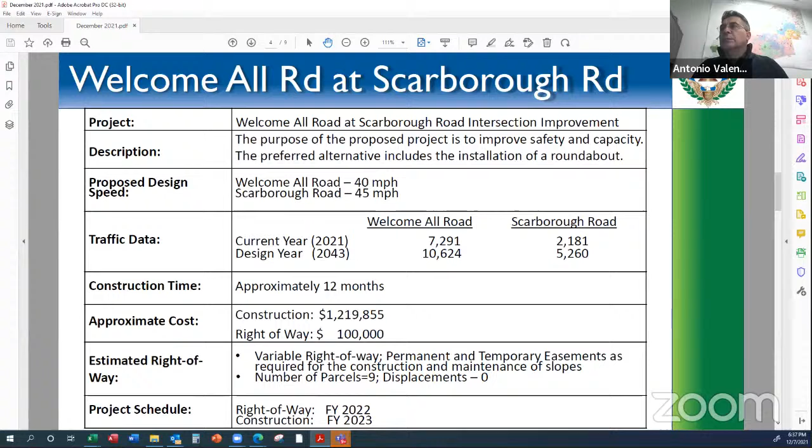The first project I'd like to discuss is the Welcome All Road at Scarborough Road intersection improvement project. I have a fact sheet in front of me here, just to give you some information on the project. The proposed project is to improve safety and add capacity. During our conceptual studies, we studied 3 alternates for this project. The first alternate was the no build, leaving the 4-way stop as is. The second alternative we looked at was to remove the 4-way stop and review a conventional intersection with a traffic signal. Unfortunately, a traffic signal was not warranted for the 20-year plus 2-year design, which would be 2043. So adding a signal, we can't. That didn't meet the need and purpose.

So we reviewed a third option, which is popular by demand, the roundabout. The preferred alternate at this point is the roundabout. That removes the 4-way stop. It keeps traffic flowing. It improves safety by reducing the conventional conflict points from 32 down to 8, so that it's safer. It improves capacity. It also provides improved aesthetics for the area, and it improves lighting as well. Lighting always makes it safer.

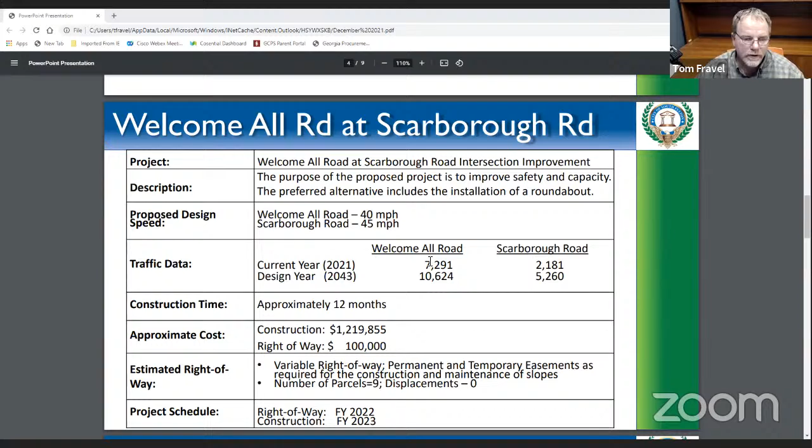We do have 9, we call them parcels, so we'll be purchasing some land and easement from 9 property owners. Then construction will be in 2023. So with that said, I'd like to go ahead and jump into our layout.

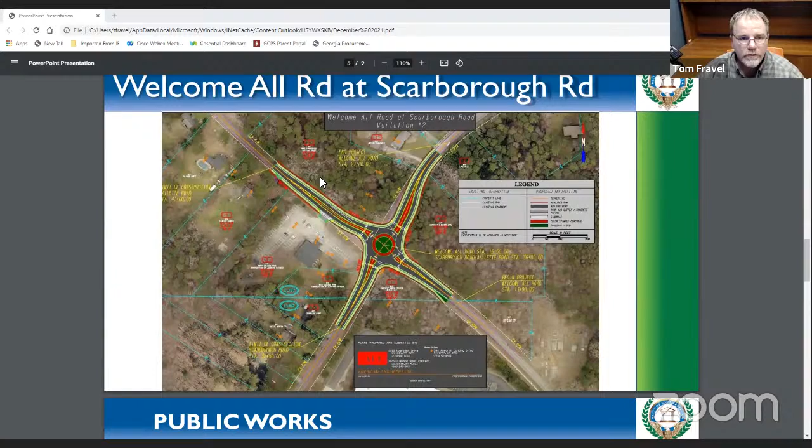And just to get everybody acclimated, this is an aerial photo, okay? So you can see my pointer. This is Scarborough Road right here. This is Welcome All here, and this is Welcome All here as well. The purple lines that you see, that's the existing edge of pavement. This is the Jehovah's Witnesses church, and we have a large industrial site here.

So you can see this is our proposed roundabout. The roundabout's going to have lighting. It's going to have sidewalks all the way on each quadrant. Between the sidewalk and the edge of pavement, we'll have curb and gutter. We'll also have a concrete red stamped brick, and that'll be for low maintenance. So this entire intersection here is handicap accessible.

So you can see this is where your crosswalks are. We have some handicap ramps here, and this line right here is your traffic islands. Splitter, so we have 4 splitter islands. The way we laid out the roundabout is we did a left-centered approach, and when you do a left-centered approach, it's easier to get into the roundabout. These roundabouts are designed for about 22 to 25 miles per hour. This will keep traffic moving.

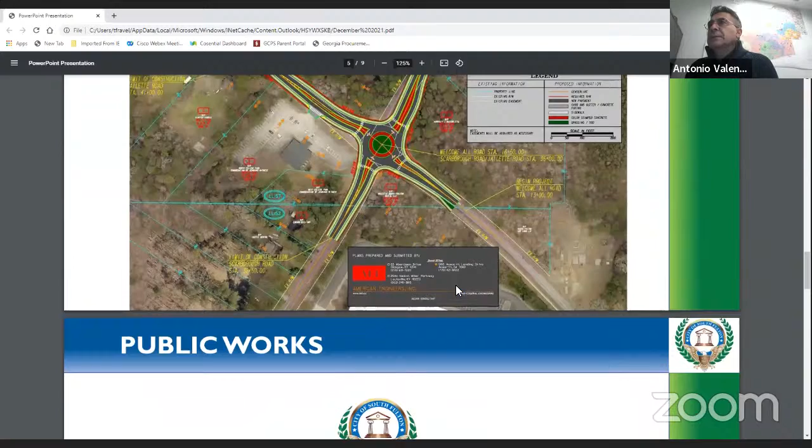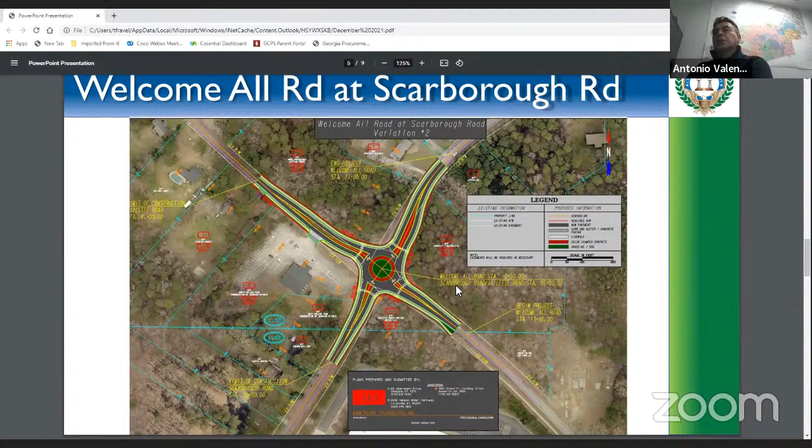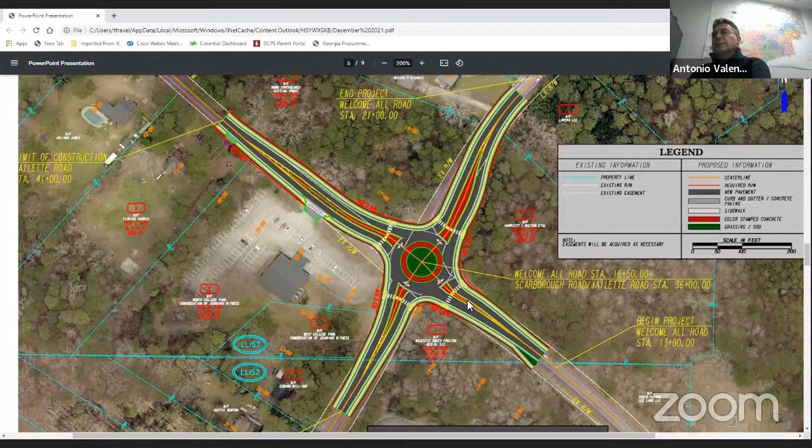But while our residents are looking into the project, Tom, can you talk a bit more on what happens to all types of vehicles that go through the roundabout? We have solid waste trucks that are very common now in our city, school buses, fire trucks just next to Welcome All, getting closer to Roosevelt Highway. Can you share with our residents how those vehicles go through the roundabouts and what you designed to accommodate those types of vehicles?

Yeah, thanks, Antonio. That's no problem. So I zoomed into this roundabout, and these roundabouts are popular at the moment. I've been out here before, and it does have some truck volumes. There's a sign posted here that says no trucks allowed, but just say we have a vehicle. You'll be going south here, and if a semi truck has to turn, he'll be coming in here. He'll have to yield. First thing, when you come up here, you have 8 points of conflict.

The first point of conflict is your pedestrian crossing here, so you will have to yield for pedestrians. If there's no pedestrians there, then you come up here to your yield. You will have to yield for oncoming traffic here. So if you don't have any traffic, you come on out. Then the trucks, this is actually designed for a large WB67.

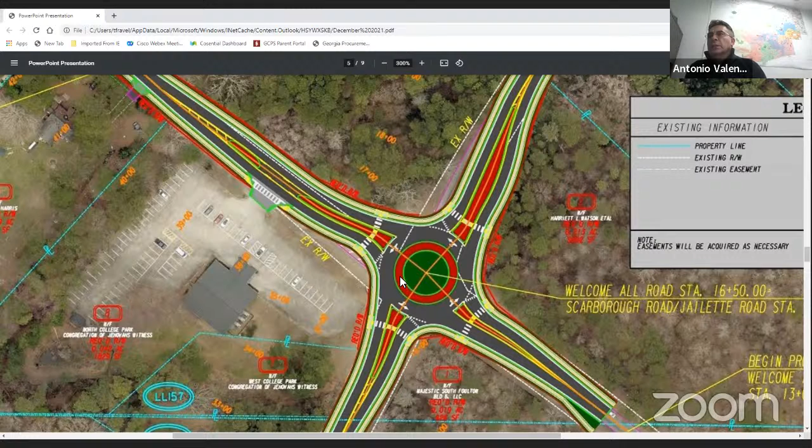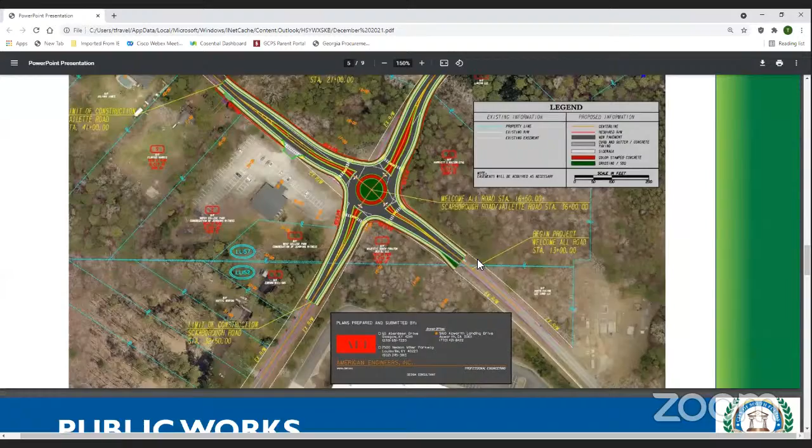So in other words, Tom, what we're conveying to our residents is that fire trucks, bus trucks, solid waste trucks that are allowed on our roads will easily and safely maneuver through the proposed roundabout. Yeah. All right. So we've got some questions coming in, and I know that we've addressed them, but some of the people were typing while you were talking and so forth. And so we'll just make sure we address it.

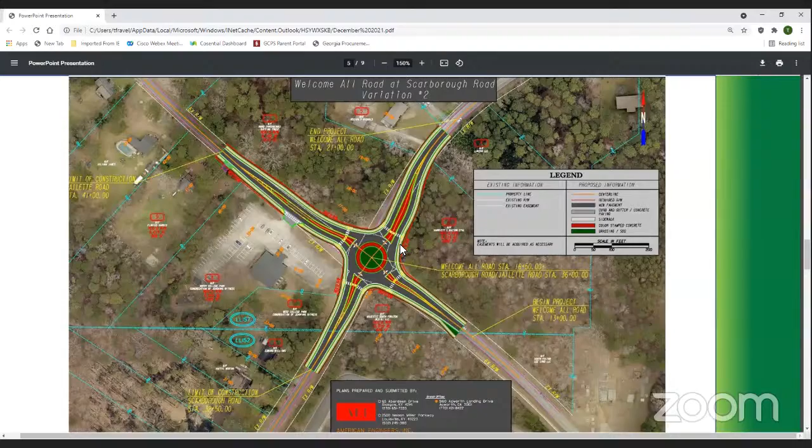Ms. Glenda Collins asked, will the roundabout accommodate for additional growth in the area, and will it accommodate large trucks? And you just explained how the trucks will maneuver through. And if you would please go back to your first slide where you showed the 20-year projection in traffic. So the answer is yes, we will accommodate for additional growth.

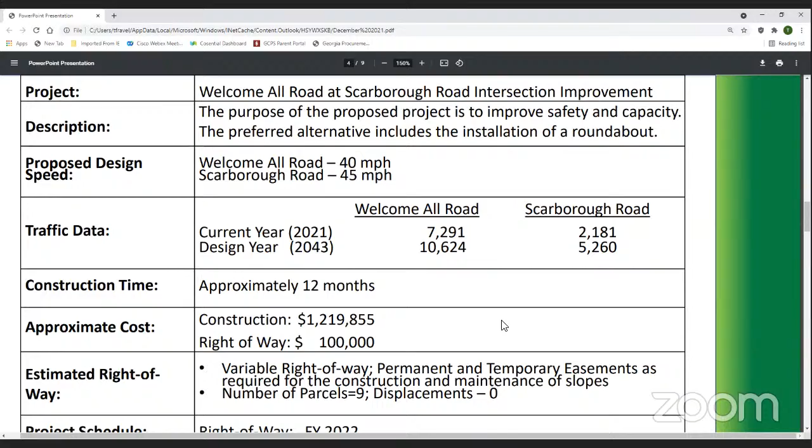Jay Horn asked, have you notified the 9 homeowners for the easements? So we have not, we're still in what we call conceptual, meaning that we haven't developed any plans yet. So the next step is for us to respond to all these comments in writing. If we don't get any negative comments, it will go a lot smoother. So then if we don't get any negative comments, if the preferred is the roundabout, in January, we'll be cut loose to do our plans.

And it'll take us about 60 days to do preliminary plans. Then we'll go through a field plan review. The city will review our plans and we'll go back and forth in some meetings. Then at that point, we'll do some right-of-way plans, and it'll take us about 2 weeks to do those. Then Ben, that was just on the meeting just now, his firm actually buys the right-of-way.

So at that point, I would say in the middle of 2022, we'll be knocking on the doors of those 9 property owners. And with 9 property owners, it probably will take us about 6 months to come to terms with all the property owners. Then we can go out to construction after that.

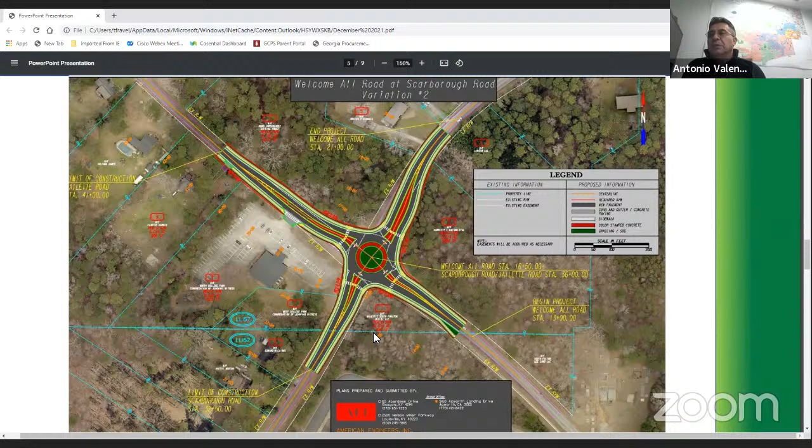Tom, if you don't mind, just explain to them what those red boxes are, where you have labeled those 9 parcels that we're looking into. Not necessarily the entire parcel. You just identify those 9 parcels that will be impacted somehow. Some will be minor and some may be a bit more. You can see here's the existing right of way here, this white line style here. Okay, so that's the existing right of way.

The red right here is required right of way, because if we have sidewalks, we can't just put that on your property, it has to be on the city property. Can you zoom in a little bit, please, Tom? Say it again. Can you zoom in a little bit? Yeah, it's going to get blurry on us, unfortunately. Right. So that may not do us any good. So this is parcel 1. Okay, so then they got a little bit here, a little bit here.

So here's another parcel here. So this is existing right of way, but we feel like we're going to have to buy some easements to be able to construct this. But you can see that the sidewalk is going to be within the existing right of way. So we can just purchase what we call temporary easements from this property owner here, and probably this one here as well. So on and so forth. Here's parcel 9. So we're not taking much property. It's pretty minimal on this particular project.

Let's see here. Another question. Let's see here. Says, will this roundabout mirror the roundabout at Sandtown? And let me address that. The roundabout on Sandtown, I assume they're making reference to the Campbellton Road at Boat Rock and New Hope roundabout, which is a similar approach, but not necessarily a mirror of the roundabout.

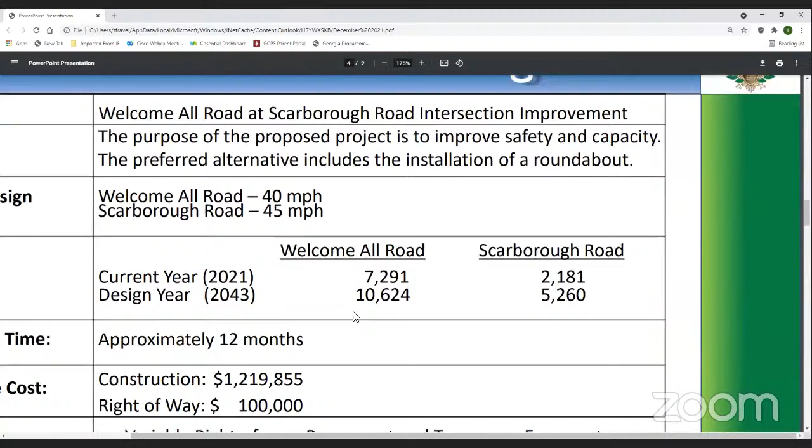There's a question, it says, I apologize if I missed it, but when will the notice to proceed be given on construction? And what is the expected completion date? That comes from Mr. Alvin Jackson. Yeah, it's good to have the dialogue. It's good to promise and be aggressive. And the nature of public works for the city of South Fulton is to ensure that what we commit is what we're going to build, and ensure that our consultants and contractors stay within the timelines committed.

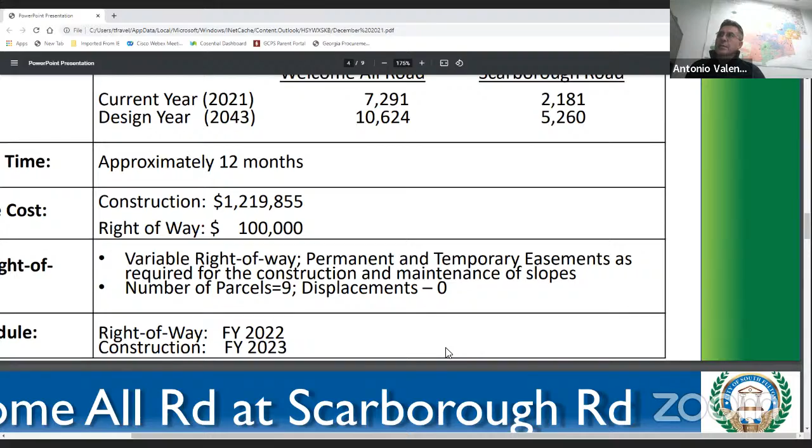However, there are certain circumstances that are not under our control, such as once we go into the stage of acquiring the rights of way, apparently 9 parcels, it should be an easy task for us. And I hope that our residents work with us. And if we successfully acquire the needed areas for this project, we'll definitely be on schedule. Our goal is 2023. And our goal to construct this project is 12 months. We probably can do it in 10 months or so, but it's all upon other constraints that are not under our control.

We have a question here from Ms. Glenda Collins. Says, will the city of South Fulton be responsible for maintenance, and were meetings held with the residents of the area? Yes, the city of South Fulton will be responsible for maintaining. Those two roads are local roads, and we will be responsible for maintaining the rights of way for the improvement of that area. Okay. Here's one, says, how much additional lighting will the design bring?

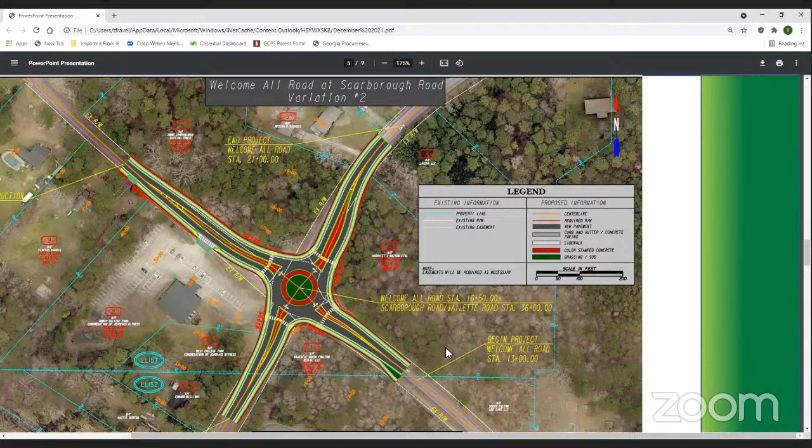Additional lighting. Oh, lighting. Street lighting. Our consultant team will work with the proper power company. They are the ones in charge of designing street lights, and our company will provide the layout to them, and the design will be provided to us. But the intention is to light the four legs of the roundabout.

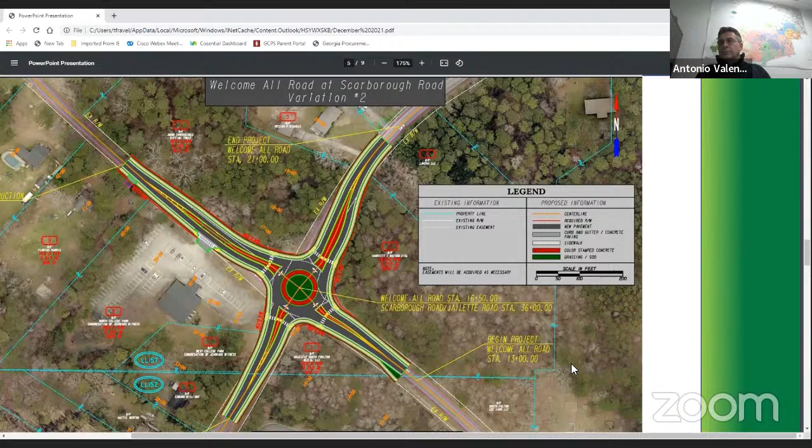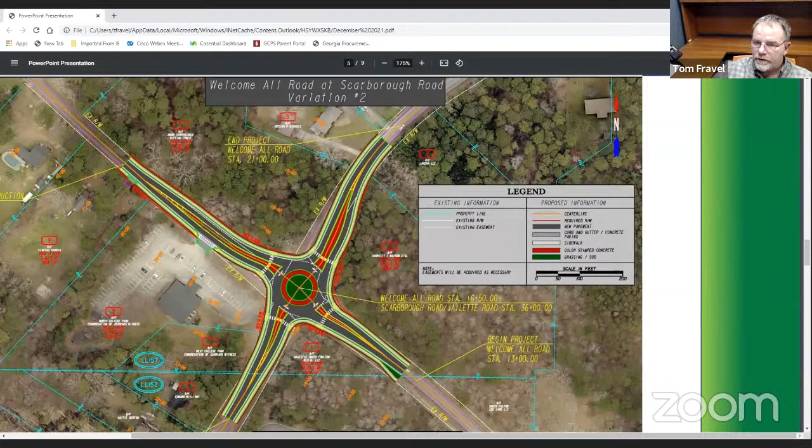I believe that gets us caught up with the questions relative to this project. Okay, I'll go ahead and stop sharing and introduce Brad on for the intersection, the second one for tonight.

You're muted, Brad. You need to unmute, Brad. We can see your display fine. Okay, you see me and hear me? Yep. Yes, sir. Sorry about that.

Okay, again, thanks, Tom. I'll go ahead and introduce my team. My name is Brad Hale. I'm with Atlas Technical Consultants. I'm the project manager for the Welcome All Road intersection at Jailette Road. I've also got along with us tonight Mr. David Fairley. He's our traffic engineer who did our traffic analysis for this project, including 2 alternatives. And then Ms. Nebiat Abraham, who's our lead designer for the job.

As far as the project, I'll just go ahead and run through. Again, this is a fact sheet similar to what Tom went over on the Scarborough intersection. Welcome All Road at Jailette is an existing T intersection, with Welcome All Road as the through roadway, and Jailette Road dead ends basically into Welcome All Road. The purpose of this project, very similar to the last one, is to improve the operational and safety issues, primarily the safety issues at the intersection of Welcome All and Jailette.

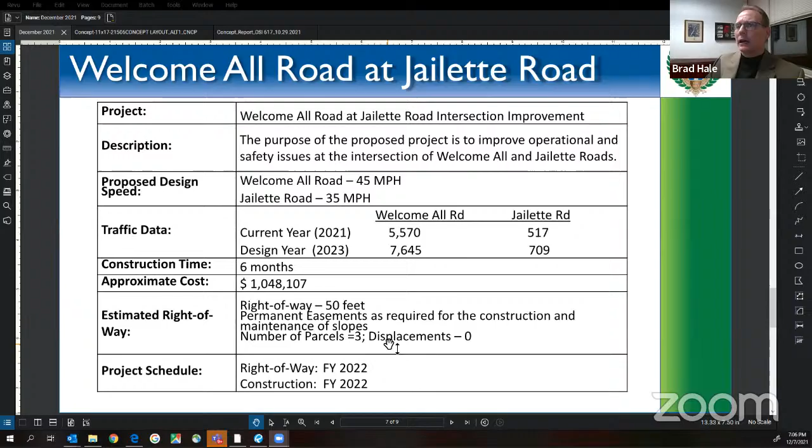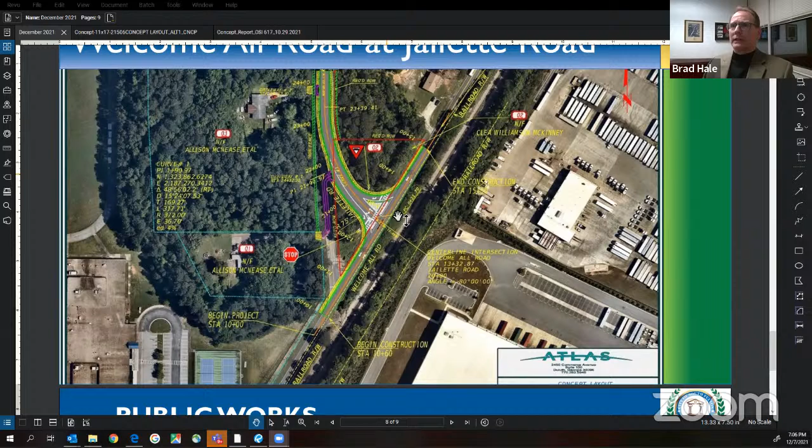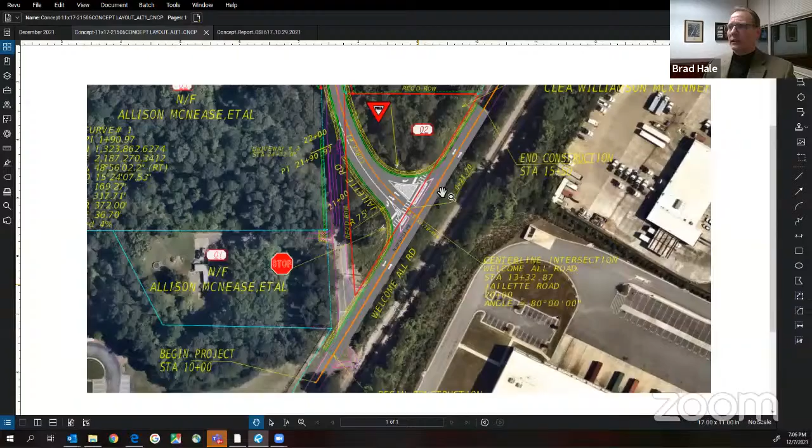I'll move on to the project display page. And this is set up very similar to Tom's. He just explained. I'll run over it again quickly, but first I'm going to switch over to a higher resolution version of the layout here so we can see a little better detail. So the gray represents our proposed construction area. These purple lines are outlines of the existing roadways. Then you can see this yellow represents proposed sidewalks.

Just like Tom's, these red lines represent required right-of-way that's necessary for the project. And then these hatched green areas represent construction easements that are needed for construction. So in this configuration, the existing intersection has a really bad, what we call skew angle at the intersection. That angle is roughly 36 degrees.

The proposed project would realign Jailette Road to have a much better intersection angle with Welcome All Road. I think that is improved to 80 degrees. Improving that geometry helps not just with operations, but with safety. You don't have cars coming to this intersection, this stop sign, and then having to look back over their shoulder. It's easier to see traffic coming from the oncoming direction.

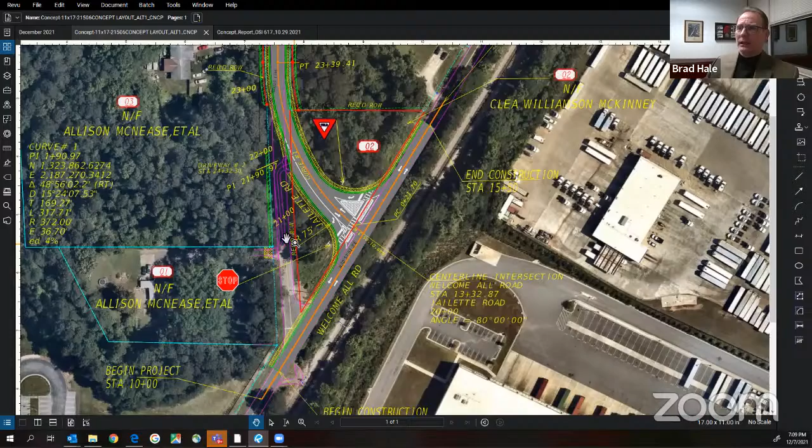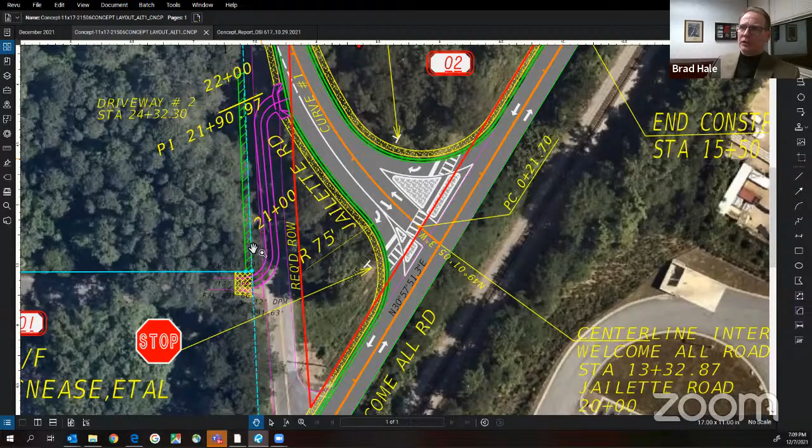Let's see. I mentioned there were 3 parcels that were impacted, and we have those labeled here. The first parcel is right at the existing intersection. We just have a small area of driveway easement. What we're proposing with our concept is, since Jailette Road is realigned away from parcel 1, we would take that driveway and run it basically along the old Jailette Road, and then tie it in further up on the relocated Jailette Road. We prefer that over tying it in closer to the intersection, so you're further away and it's easier to get in and out, and not having to get across the multiple lanes of traffic.

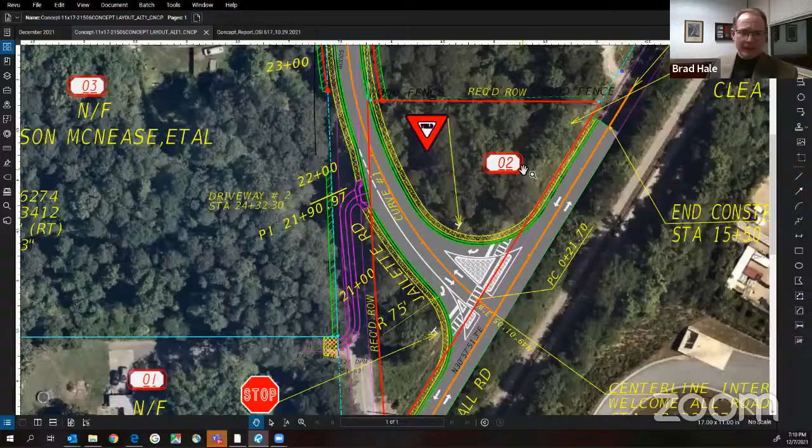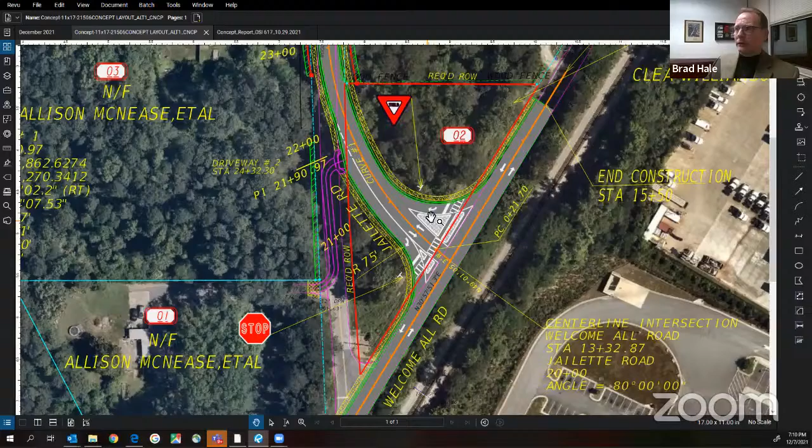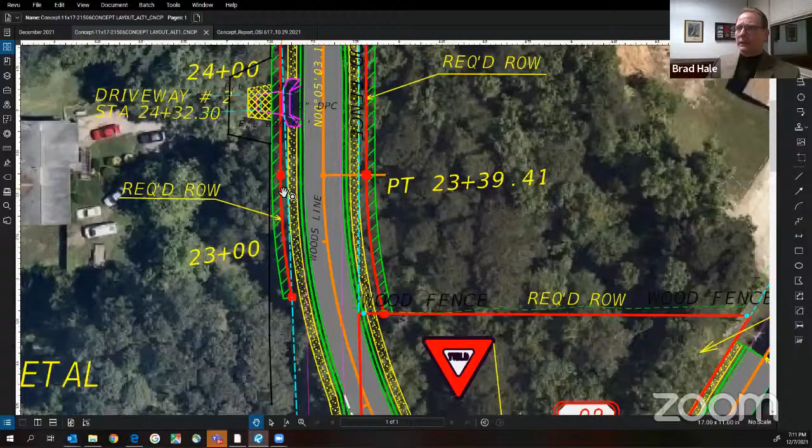Then parcel number 2, as I mentioned before, is the parcel that'll be a total take. It's a triangular wedge of land that's undeveloped, that the proposed realignment of Jailette will go directly through. Let's see here. I'm sorry, I said 3, we have 4. So parcel number 3, again, we have some easements and just a sliver of additional required right-of-way. This light blue dashed line represents the existing right-of-way. The red line is where the required right-of-way would be. So it's just a few feet, and then some additional construction easement beyond that. Same thing on the other side, which is what we're calling parcel 4.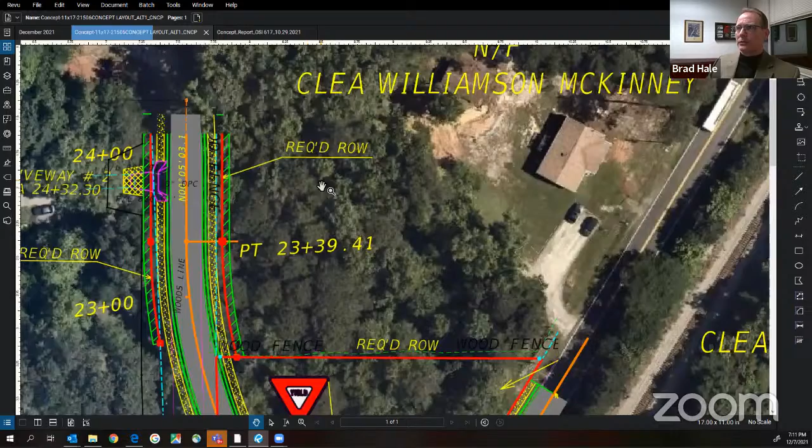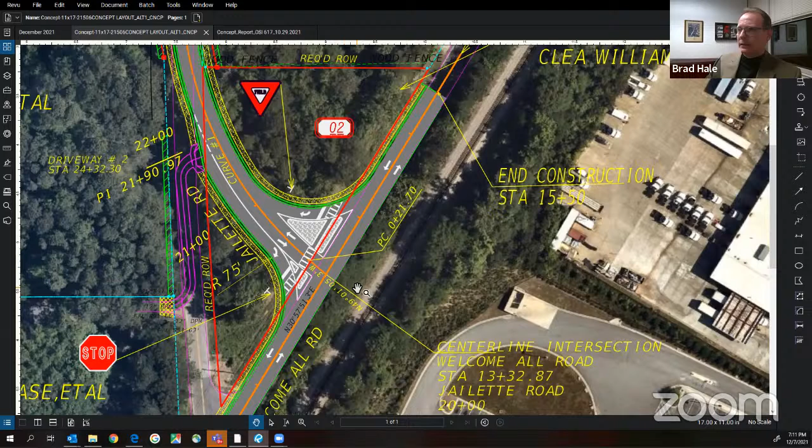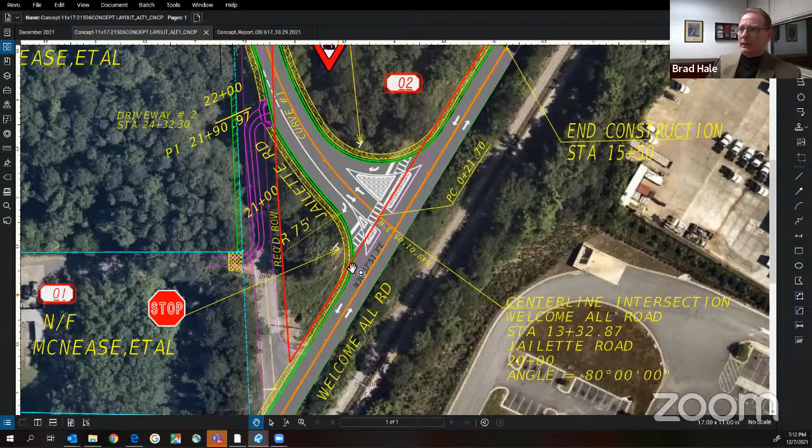Running along the southeastern side of the intersection is the CSX Railroad. The railroad's right-of-way actually overlaps the existing pavement of Welcome All Road. So we'll be coordinating with the railroad for the remainder of the project. On the railroad side, we're not proposing to add curb and gutter or sidewalk in order to reduce impacts within the railroad's right-of-way. Everywhere else on the north and east side of the improvements, we're proposing to add curb and gutter and a 5-foot sidewalk.

This intersection will remain a stop condition with a stop sign, and that was a result of what's called an intersection control evaluation that was done on this intersection. I'm going to let David Fairlie, our traffic engineer, give a real quick synopsis of what that intersection control evaluation is, and how we came up with our results in this solution.

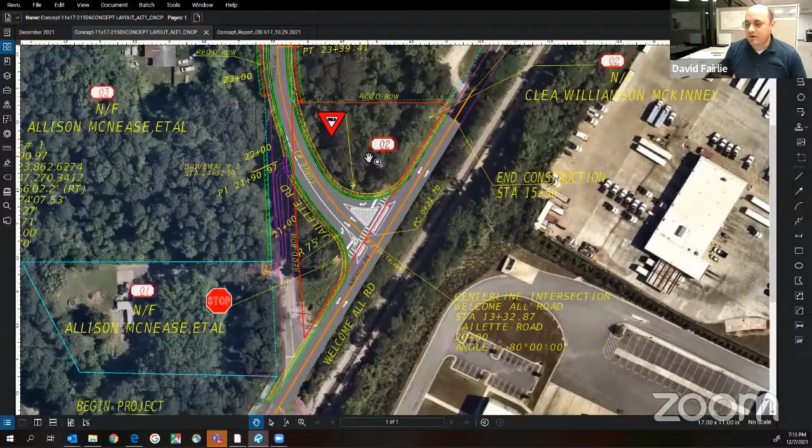Yeah, thanks, Brad. I don't have any screen to share, so I'm just going to explain it verbally. The ICE evaluation is a process that we use to help develop different recommendations for the intersection. The purpose is to provide traceability, transparency, consistency, and accountability when we identify which solution we're going to end up implementing at the intersection.

Part of the process involves taking into consideration things like crashes that occurred at the intersection, and how the different designs are going to address these types of crashes. Some solutions have more impact on certain types of crashes than others. We also consider the cost of the solution, right-of-way impacts, utilities, all those things. At the end, the process gives a rating or a score to each of the alternatives, and that gives us an idea of which solution is the better one to go with when all things are equal.

For this one, we considered 2: this one, which is adding turn lanes and making the angle of the intersection more of a right angle, and the other one was a roundabout. We didn't consider a traffic signal because the warrants are not met. Basically, there's not enough vehicle volumes to justify putting a signal there. And there's all sorts of problems that come up when you implement a signal at an intersection where it's not warranted.

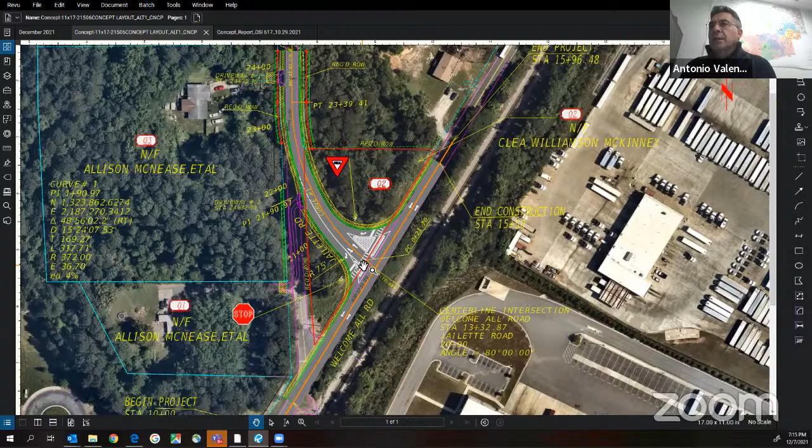David, can you explain a bit more, for transparency for our residents, on the counts that we have on Welcome All and going into Jailette Road, and the reason for the short right turn from Jailette into Welcome All? Those will be pretty much the additions, besides moving the intersection to almost a 90-degree angle.

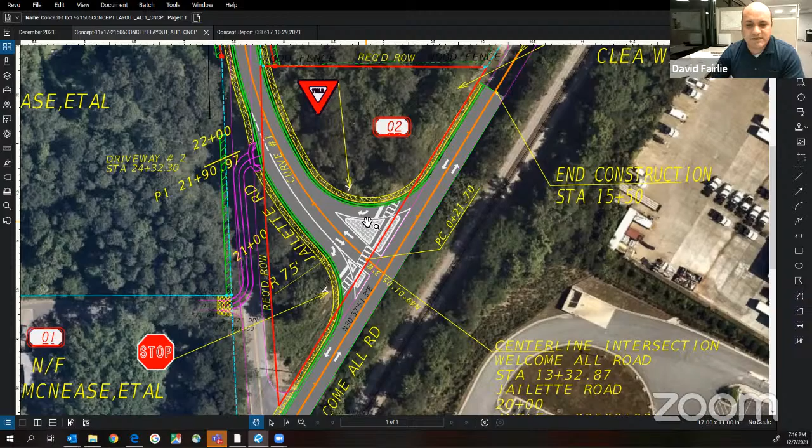So, regarding the volumes, we conducted counts in June. I think it was June 24th. It was a Thursday. And since school was not in session, we had to do a trip generation study for the school, which is basically figuring out how many vehicles come in and out of the school and at what times, and adding those trips to the count that we did in June. With those counts, we were able to determine what the length of that right turn lane is. I think that was your question, how we determined what length that right turn needed to be.

That's correct, David. Yeah, so we do a queue analysis to try to figure out the expected length of the line of cars that's going to be queuing up at the stop sign, and how many of those are going to be turning right versus turning left. With those calculations, we can find the appropriate length for that lane, so that we don't make it too long and spend unnecessary funds on more pavement, or too short that it doesn't accommodate the number of cars trying to make the turn. Thank you, David. Yeah, no problem.

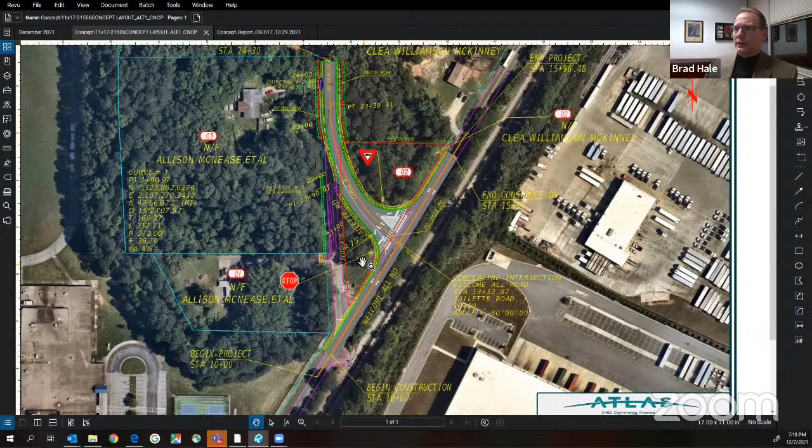Okay. I think that pretty well covers what we're proposing to do at this intersection. Again, this one is a little simpler intersection than Tom's. But this improvement to the geometry, adding the turn lanes, will improve the operations of the intersection and should improve safety as well. So we're excited about the project. Antonio, anything else you need me to point out or discuss on the concept?

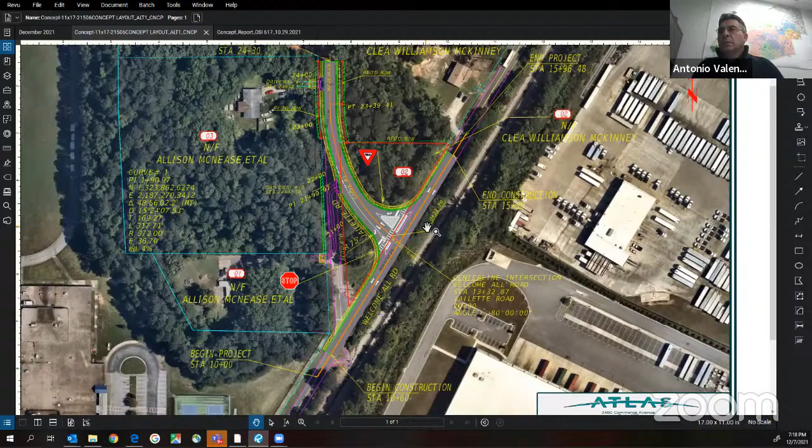Brad, I think you have covered most of the items that we can share with our residents at the conceptual level. With that said, I would like to open up for questions, hopefully lots of questions we can discuss with our residents, and I'll turn it loose to Ben. All right. Just to let you know, we now have 30 viewers watching. I don't believe we've received any questions on Jailette.

There was a question that probably goes back to Welcome All at Scarborough. It says, is it possible that prior to entering the roundabout, you can add ridges, slow, caution markers, mini bumpers on all 4 roads to alert the drivers to slow? So I'll let you address traffic calming, Antonio. Sure. Let me see if I can address that, but Tom, are you around?

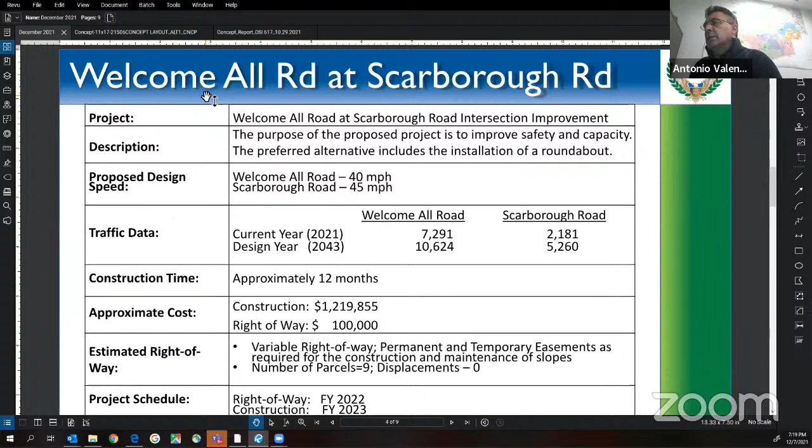Yeah, I'm still here. Let's address all the signage that we'll be installing ahead of the roundabout: pedestrian crossing, posted speed limit, roundabout ahead. Yeah, we'll have 2 advance warning signs of the roundabout, roundabout ahead. Then we'll put a posted 20 miles per hour speed limit there that goes around it. Usually during the day, everybody can see the roundabout. It's at night when you've got to be careful. Some counties and cities don't light them by preference, but as Antonio stated earlier, these will be lit.

Then there will be a lot of signing and marking. We hinge on the Georgia Department of Transportation with all their standards and details. So all these TSPLOST 1 projects that Antonio's designing will be signed very similarly. And not to close off the extra signs we can put, roundabouts nationwide are always in the motion of enhancing those things. The good thing about a roundabout is that we can always add more things as needed, on a case by case basis.

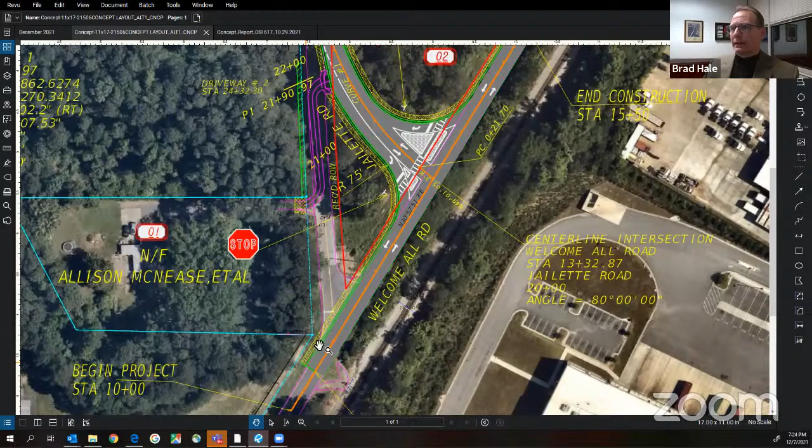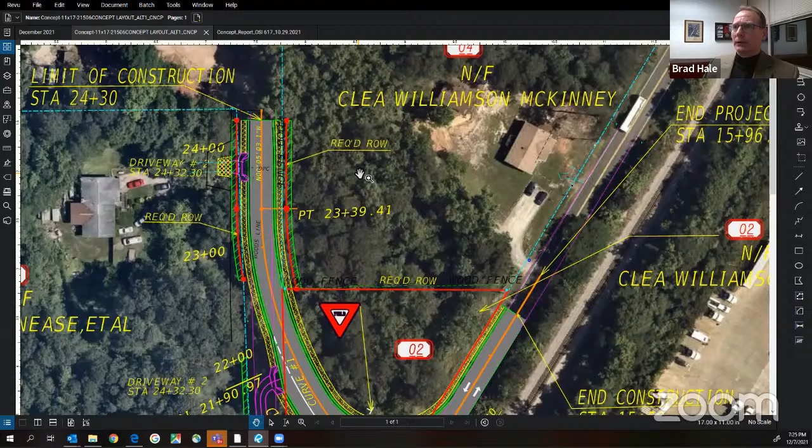It says, will there be sidewalks added at Jailette? Yeah, so the answer is yes, but on the side opposite the railroad only. So we'll add a 5-foot sidewalk, and let me go ahead and share my screen again just so I can show it. So sidewalks will be added on the northeast side of Welcome All Road. You can see them here, they're patterned in yellow. And up Jailette Road to the end of our project. The project limit on Jailette Road is about 500 feet or so from the existing intersection.

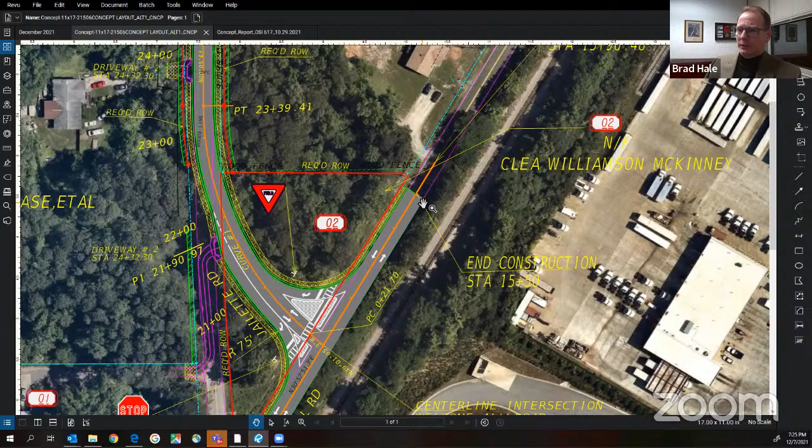And then wrapping around, tying in at the end of the project on Welcome All Road, just before we get to what we're showing as parcel number 4. But no curb and gutter or sidewalks proposed on the CSX Railroad side.

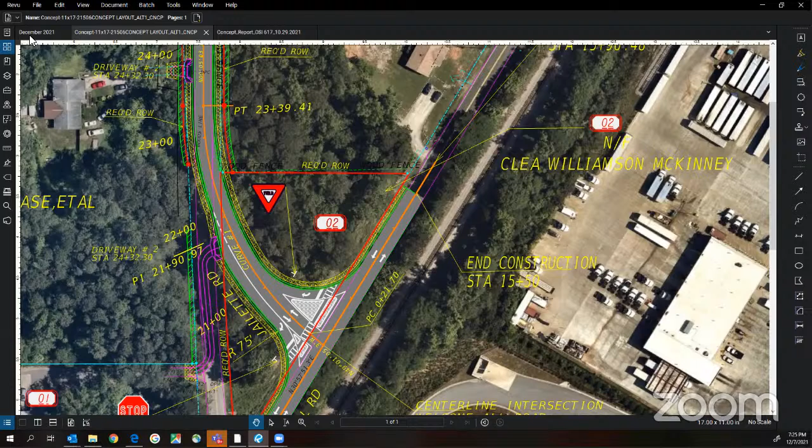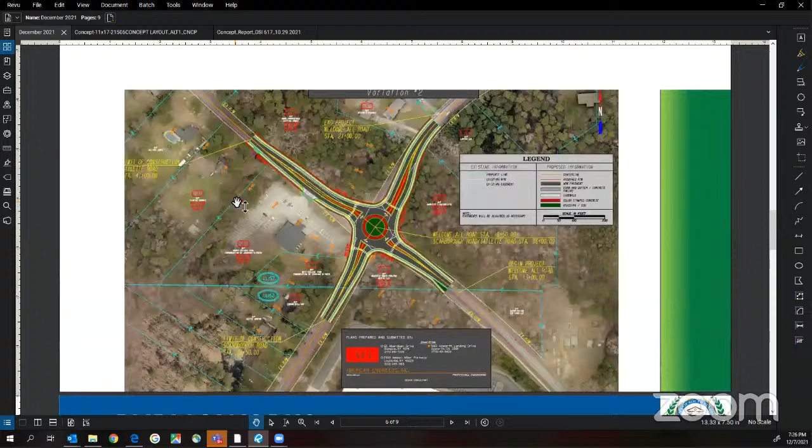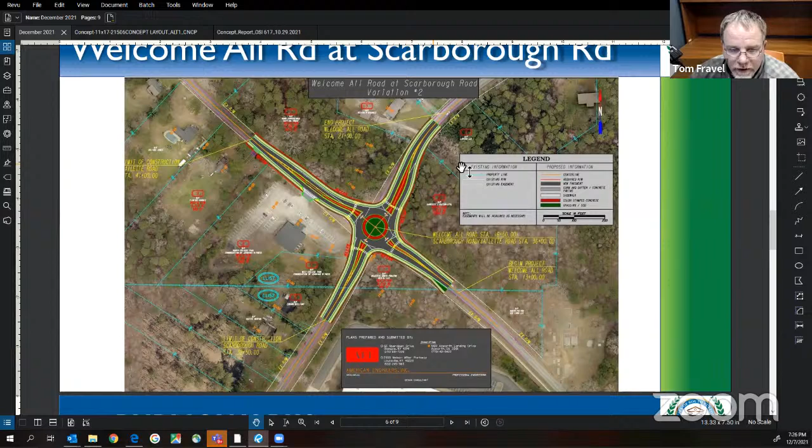And another question regarding accommodating trucks at the roundabout, just in case they missed it. Tom, would you explain again how we designed for trucks, but trucks are not necessarily allowed on those roads? Yeah, no problem. Every roundabout's unique, as we discussed earlier, and every one of them has a different radius, or diameter. Okay. Yeah, you can zoom into that if you want to.

So with this particular one, we try to size them as small as we can, so it can cut the cost and the impacts to property owners. But they do have to be sized so a truck can maneuver around it, because if a truck came up to this and couldn't maneuver around it, they'd have to back up a quarter mile, half mile, mile. So we don't want that to happen. These roundabouts always have about 20 feet of pavement, which is in the black. But for a truck to maneuver around them, they can use the red, which is what he's drawing right there now. That is the truck apron. The rear tires of the trailer will utilize that to get around the roundabout.

If you didn't have that apron, you would have to make the roundabout a lot larger, which would impact parking lots, things like that. And the truck apron is also there for safety for inexperienced drivers, like school bus drivers. They can't make the turn their first time, they'll hug that truck apron. But we will make it friendly for the truck drivers.